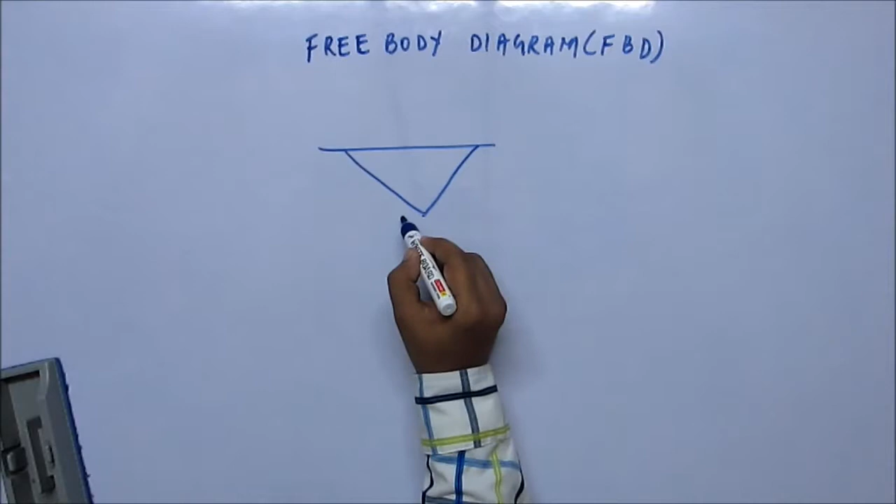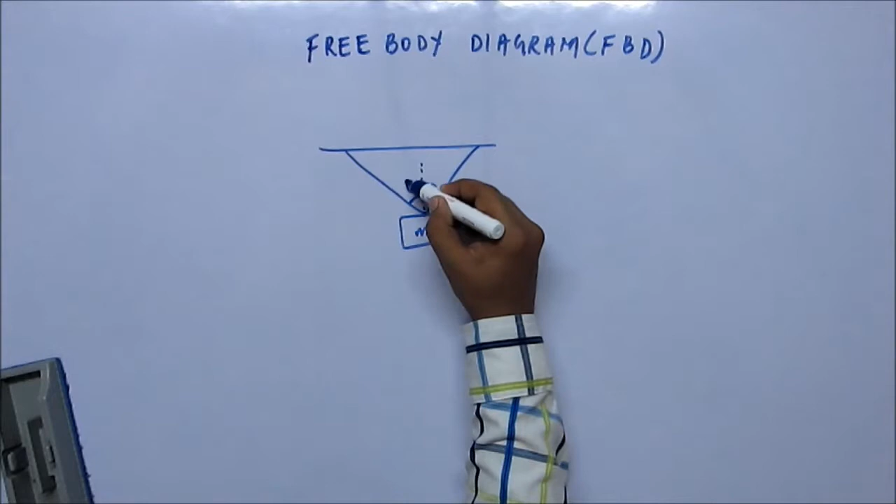So now we are just learning to draw FBD, and later we'll see how we are going to use this FBD. Suppose there is a body of mass m and this is a string, and this is hung from ceiling. The whole system is at equilibrium and these strings are symmetrical with respect to the whole system. That means this angle theta is same as this angle theta. Now you have been asked to draw the FBD of this mass m.

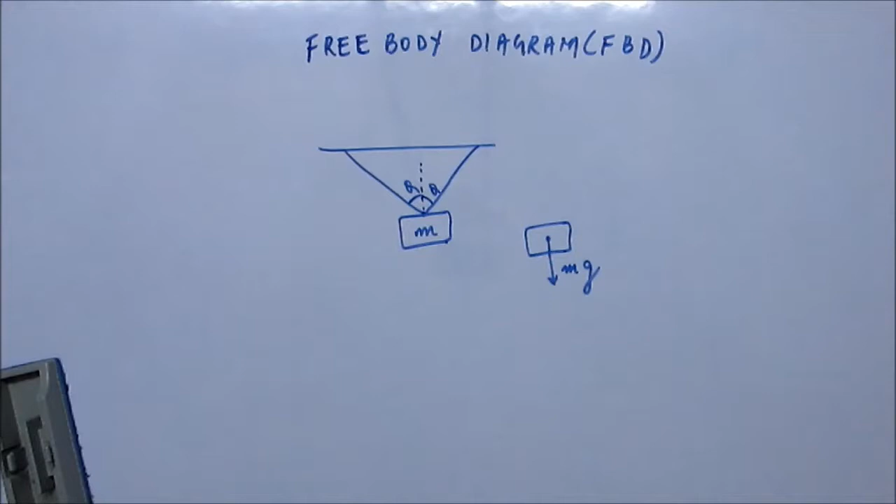To draw the FBD of mass m, you have to take into account all the forces acting on mass m. One obvious force is mg, force due to earth pulling it downward. Now this has to be balanced by the tension in the string, as one of the forces we studied before. There will be some tension in the string and that tension will act along the string. So there is a tension T and there is another tension T, making angle theta with vertical.

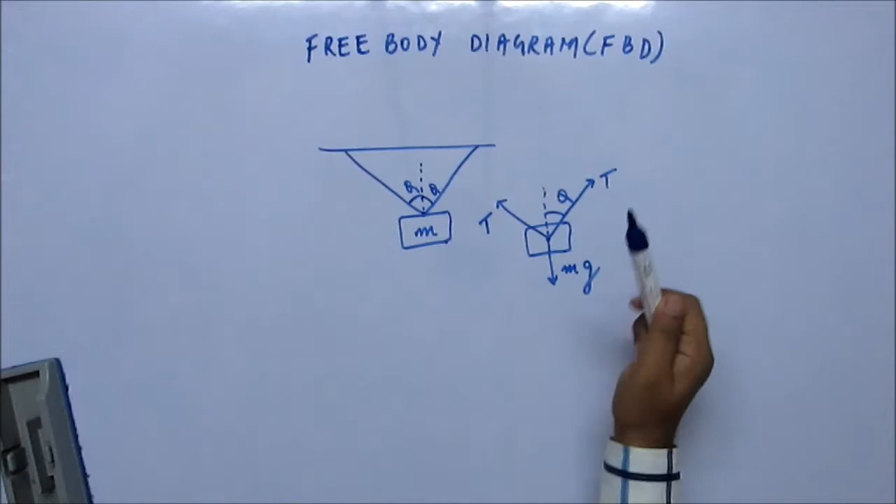Again, as you can see, this vector I have drawn a little smaller than this vector, but this is just an indicative diagram. You don't have to take these things very stringently that the length of both tensions has to be the same. You have drawn the proper direction and with almost same length, that is good enough. This FBD is good enough. There's nothing wrong in this.

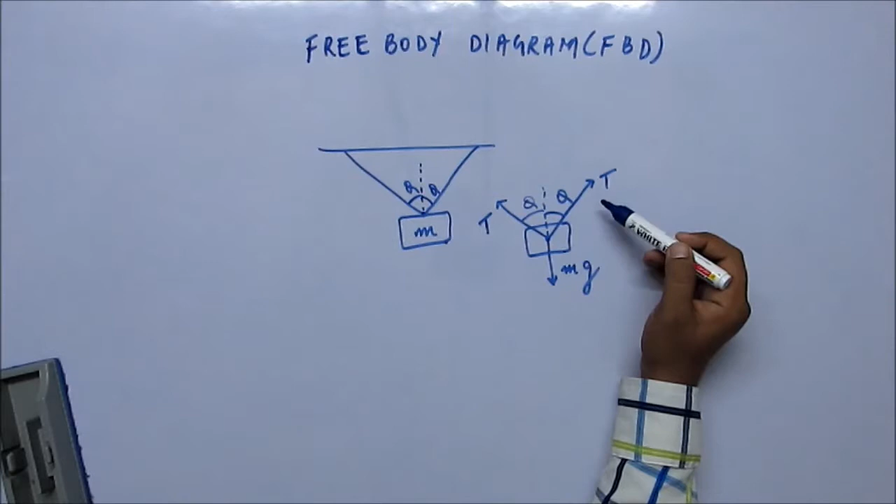Okay, so this is the FBD of the block, and when we look at the equilibrium condition that we're going to study a little while later, we're going to find out how much will be the tension in the string and those things. But for now, this is the FBD of the block, showing all the three forces acting on the block.

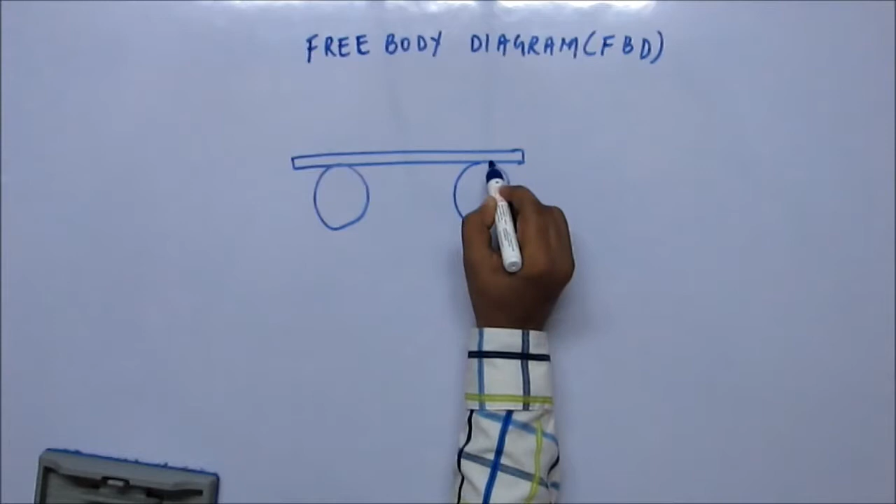Okay, this is a system. Two spheres are kept on a surface and there's a plank kept symmetrically with respect to both the spheres. Now you have to draw the FBD of the plank. Now if you have not started yet, you should take a piece of paper and pen and do it along with me. If you're just sitting and watching, you're losing. You're not learning anything. So we're going to draw the FBD of this plank. FBD will include all the forces acting on the plank. So we have to isolate the plank from rest of the system and look at the forces.

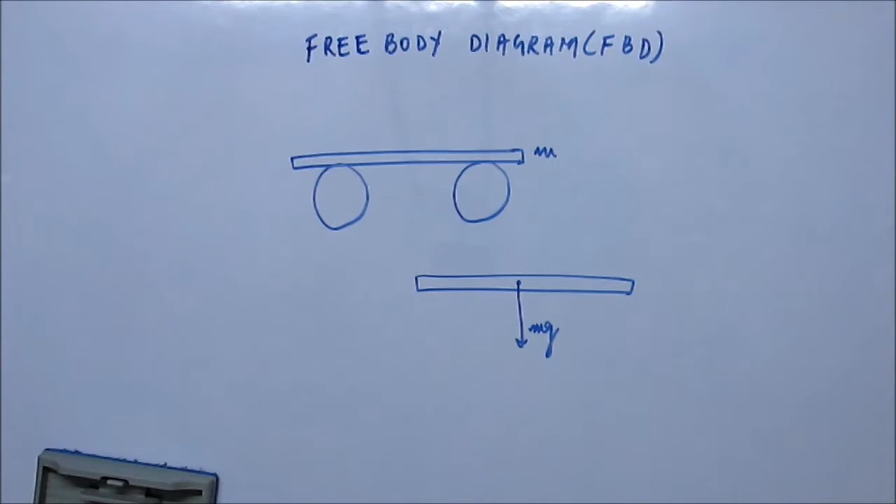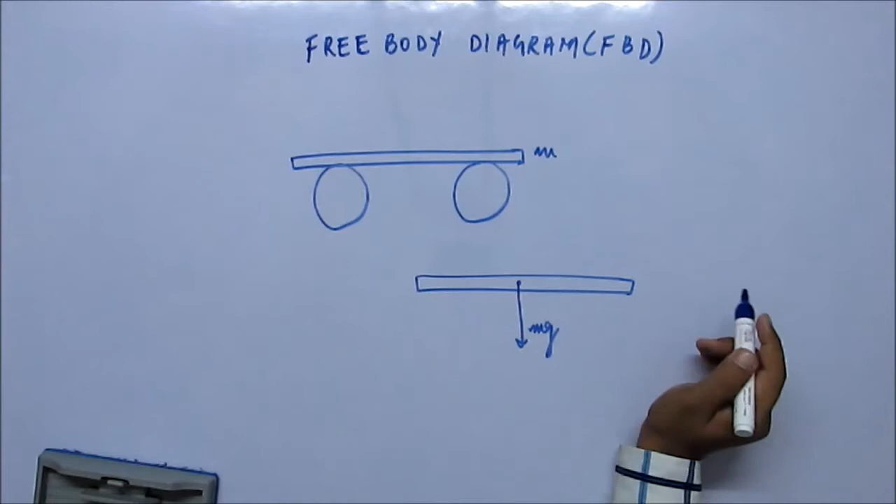Gravity acts on the center of mass. This is how mg would be acting. Suppose m is the mass of the plank. So gravity is acting downward, and there are two contacts you can see, and there will be some normal reaction on both the contacts, and by the argument of symmetry we can understand both would be the same. Later on we'll see why both will be the same, but for now you can call this normal reaction N1 and this normal reaction N2. So at the point of contact, you show normal reaction N1, and here there's another normal reaction N2.

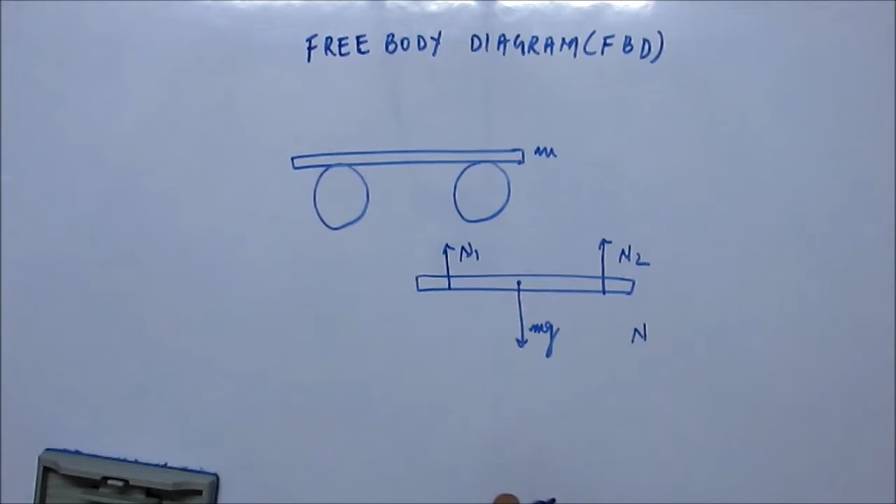And from the condition of equilibrium, we understand very well that the forces in the vertical direction should balance. N1 plus N2 should be equal to mg. Only then the forces would be balanced and the plank would be stationary. Okay, now draw the FBD of one of the spheres.

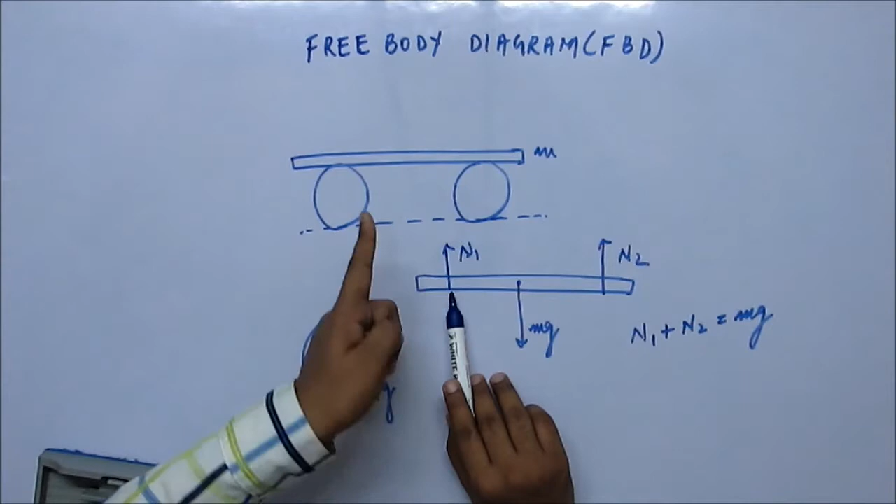For the sphere, one force of course is mg, let's call it m1g, acting downward. There are two contacts for the sphere: one is from the surface, another is from the plank. So there will be some normal reaction from the plank, and that normal reaction will be downward on the sphere because the plank is kept above it. The plank is pressing it downward, and from the reaction pair you can see the normal reaction on the plank is upward, so the normal reaction on the sphere will be downward. So there will be some normal reaction at this contact point acting downward. The magnitude of these two will be the same; they are an action-reaction pair.

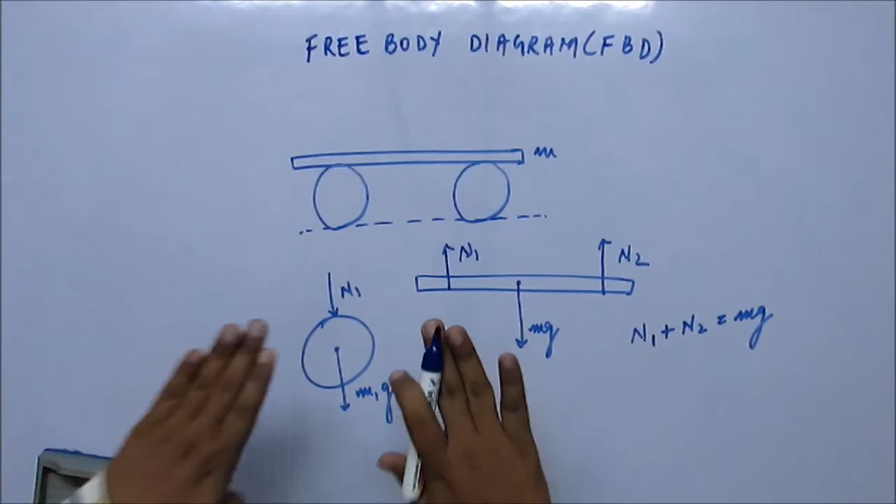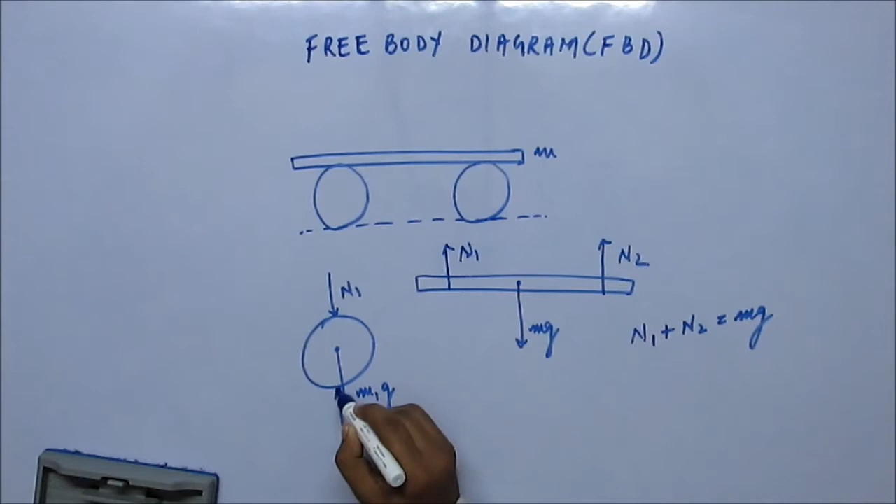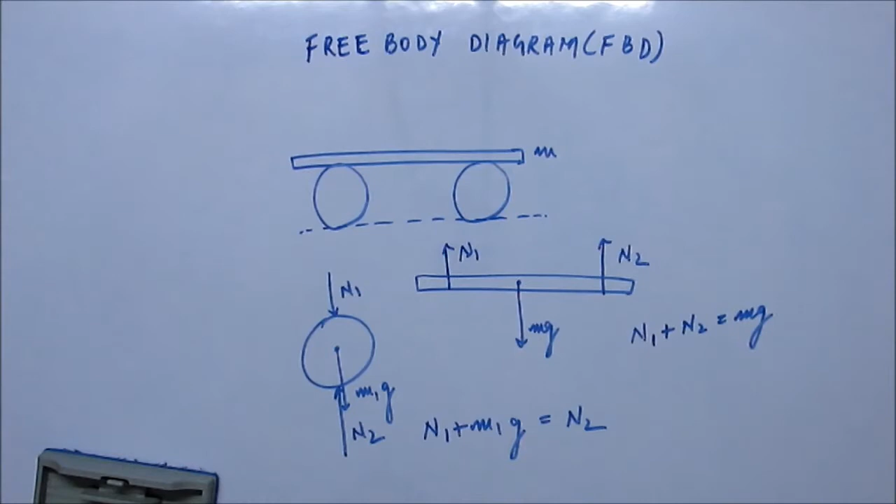And now this normal reaction and this m1g, that means the plank is pressing it downward and the earth is also pulling it downward, and both forces should be balanced by the normal reaction from the surface, so there will be a third normal reaction from the surface acting upward. Let's call it N2. Now from the static equilibrium condition you can write this equation: N1 plus m1g, forces acting downward, should be equal to N2, forces acting upward. Then only the sphere will be in equilibrium. So this is the FBD for the sphere.

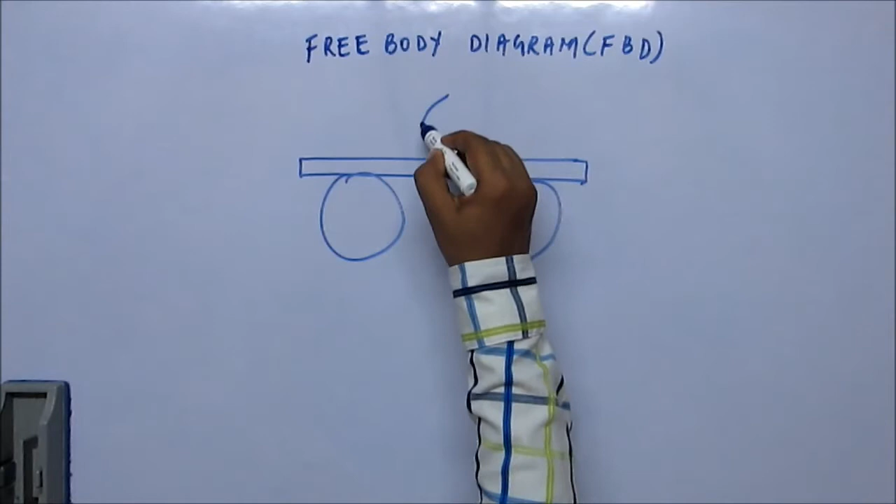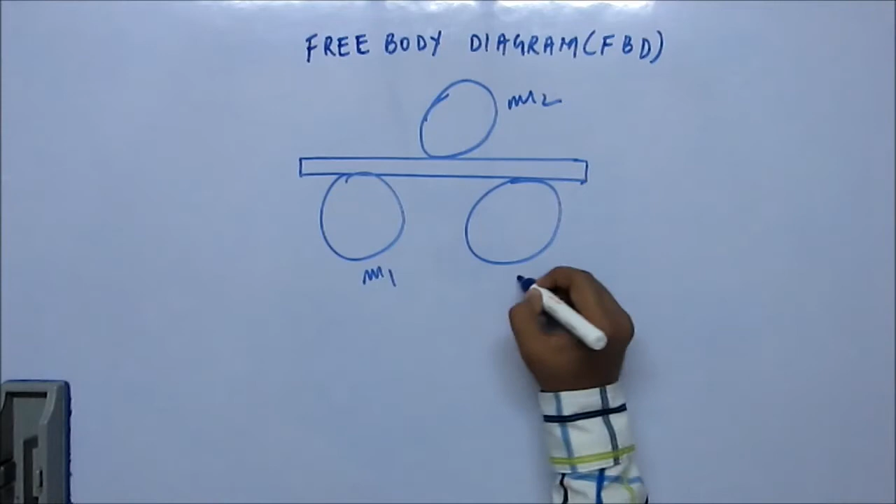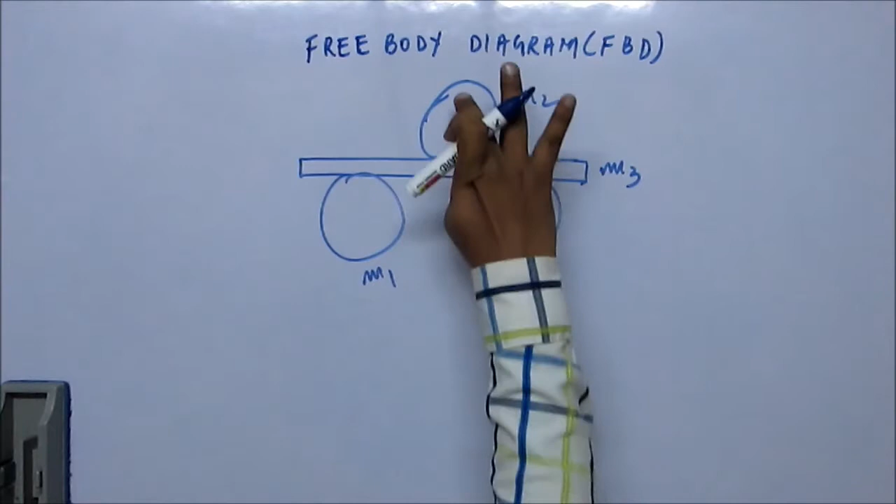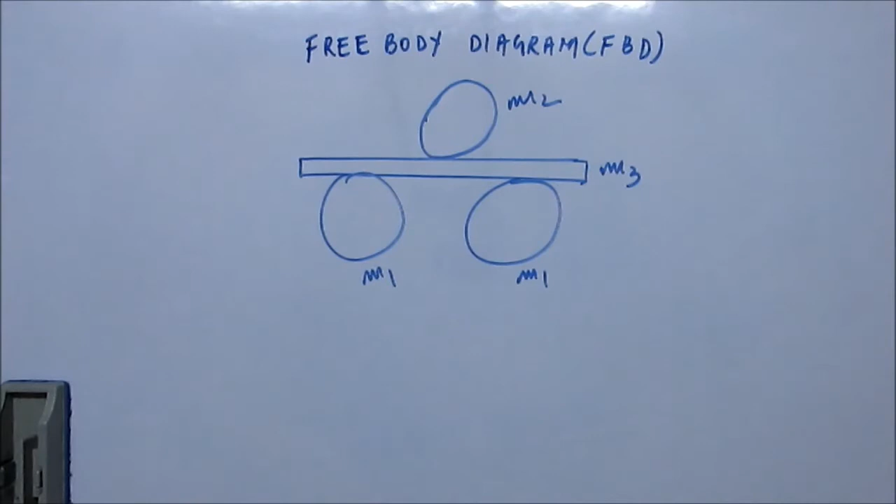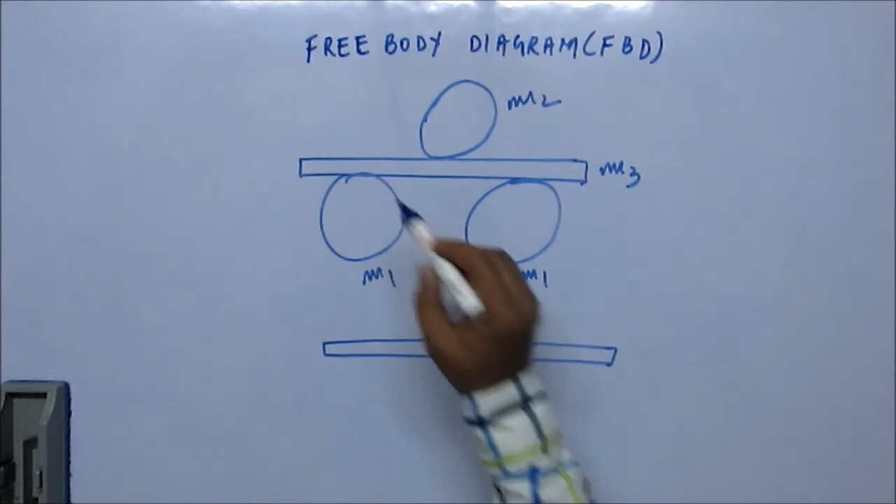Okay, the FBD should be something like this. mg acting downward from the center. There will be a normal reaction at this contact, and since the sphere is kept above the plank, the sphere would be pressing it downward and the normal reaction on the plank would be downward. Let's call it N2, by the mass M2. And from here the plank is pressing these two spheres downward, so the spheres would be pushing the plank upward. So the normal reaction at these two contacts would be in the upward direction. So this is the FBD of the plank.

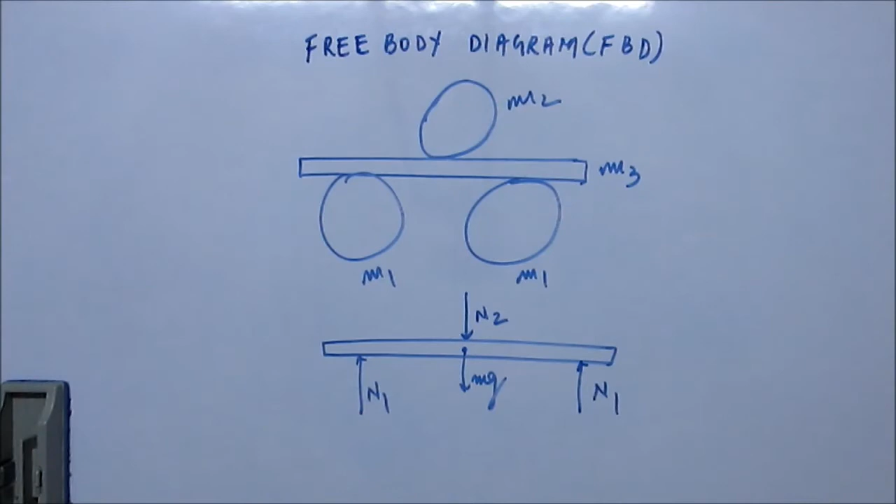Similarly, you can draw the FBD of the spheres as well. For the sphere, there are only two contacts, from the surface and from the plank. So there will be two normal reactions. One force will be mg downward. At this point, the normal reaction will be downward because the plank is pressing it downward. So N3 would be downward. And from the surface, the normal reaction will be upward.

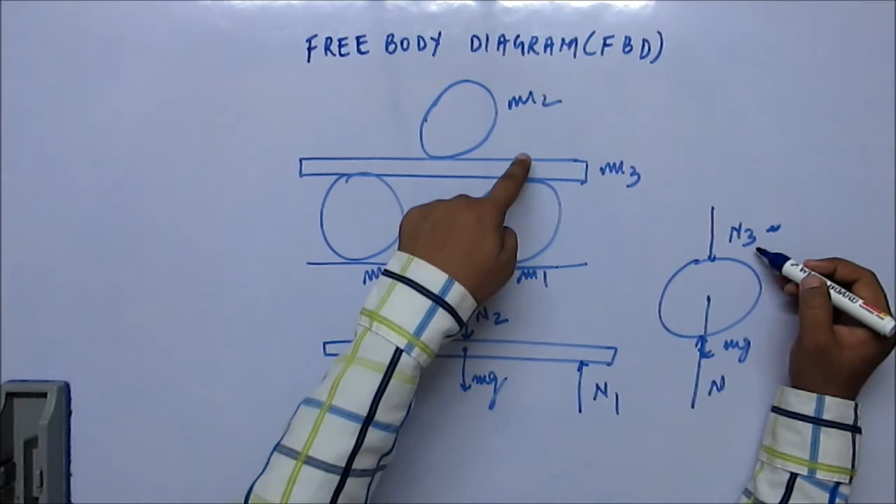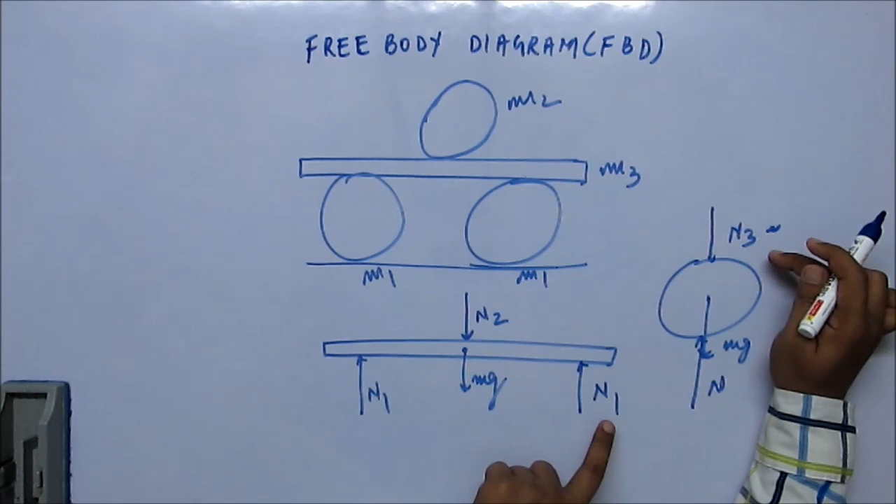Now N3 is the normal reaction by the plank, and on the plank, N1 is the normal reaction by the sphere. N3 and N1 are an action-reaction pair. N3 I have shown as the normal reaction from the plank on the sphere. N1 I have shown as the normal reaction from the sphere on the plank. N1 will be equal to N3. So later on, when we write the equations for equilibrium, we have to understand that we don't have one extra variable. Actually, N1 is equal to N3. Okay.